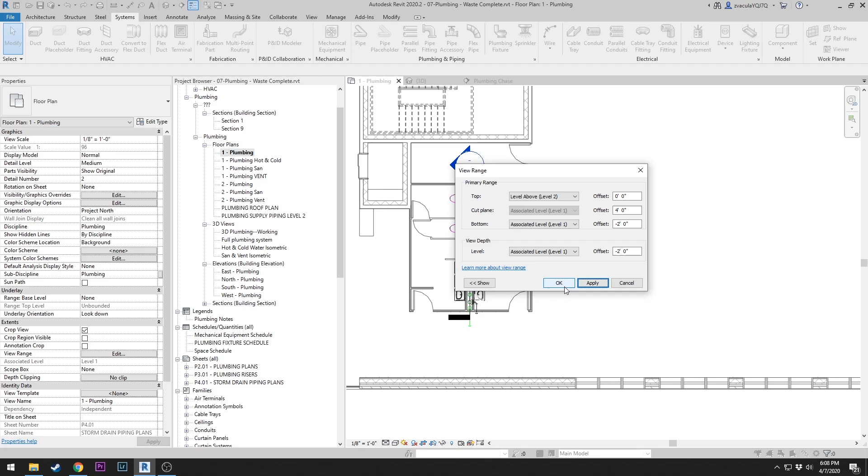Okay, so we have our view depth set. We're going to start by going to the pipe tool. This is going to be a 2-inch pipe. Our middle elevation is going to be at -2 feet underground. And important, you want to make sure this is on the copper pipe type, and that our system type is set - maybe set from sanitary or vent from doing the last project. You want to make sure this is set to domestic cold water right here. This will allow the filters to make the visibility look correct.

Okay, so I'm going to come from the exterior of the building here, and I'm going to bring it up and over in a 90. We're going to be coming into the chase here.

Now, depending on where you set your pipe, we might need to nudge this over to the left a little bit just so we can fit our pipes in here without interference. So luckily, if you created one big system, you should just be able to highlight one pipe and use your arrow keys to nudge these pipes over.

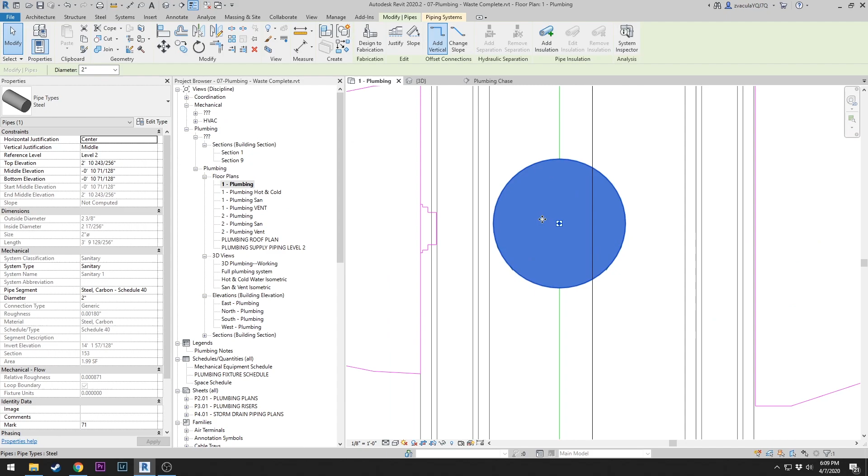I'm just going to make sure that we stay inside the chase, but make sure I have at least over 2 inches over here. That's almost 3. So that should give us plenty of space here to draw our supply pipe.

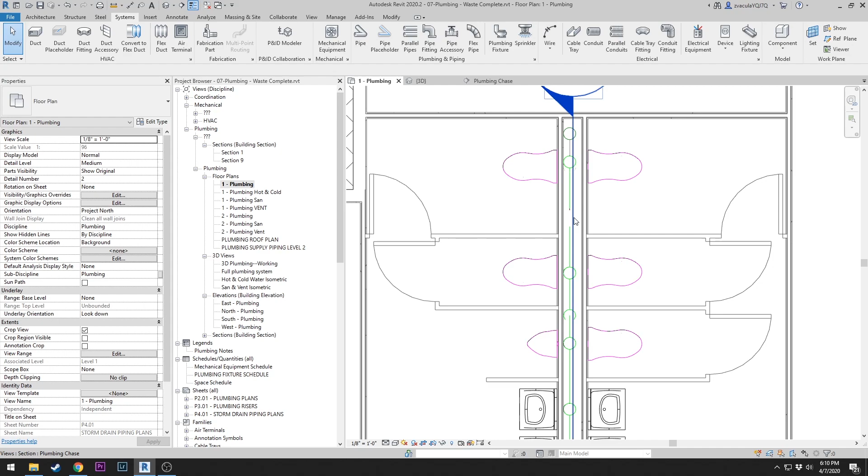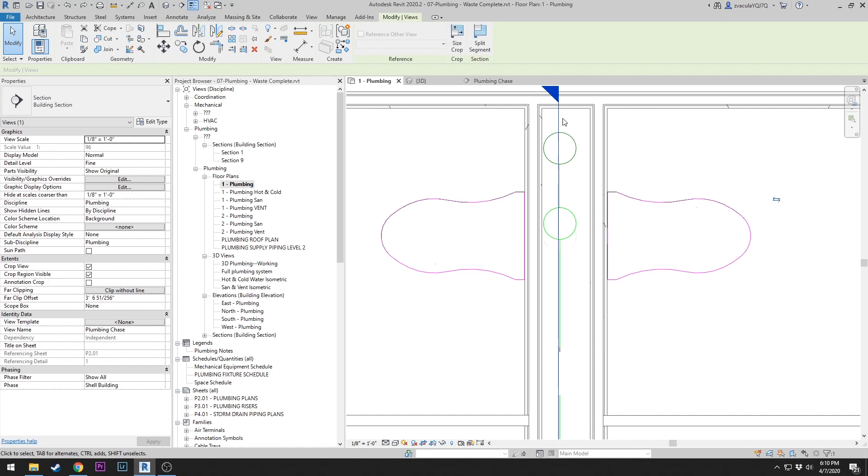And also, we're going to unpin and move our section here. In the previous lesson, I said to pin it and not move it because you couldn't align it. Well, in 2020, you can actually align sections to other pieces. So this is good for us, so if we need to come back and be on this chase plane, we can just align it with the pipe and go about using that same section.

Alright, so I'm going to scoot this section back where I can see my supply pipe, at least, is crossing it a little bit. And I'm going to go into my section, zoom out, and see the blue. The blue is your supply here.

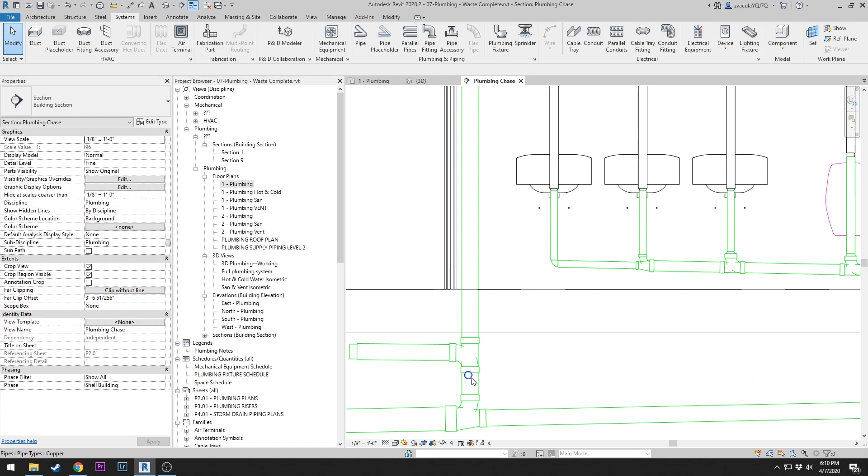So I'm going to create a similar run, hit it here in the center, and drag this straight up. And remember, we moved this over so this is running directly side by side with the drain pipe here.

Okay, so I'm going to draw up and over. I'm going to draw out a 90 here so we can feed in, try to connect to that pipe so we can have a stub out right here. And I believe this one is 1.5 inches.

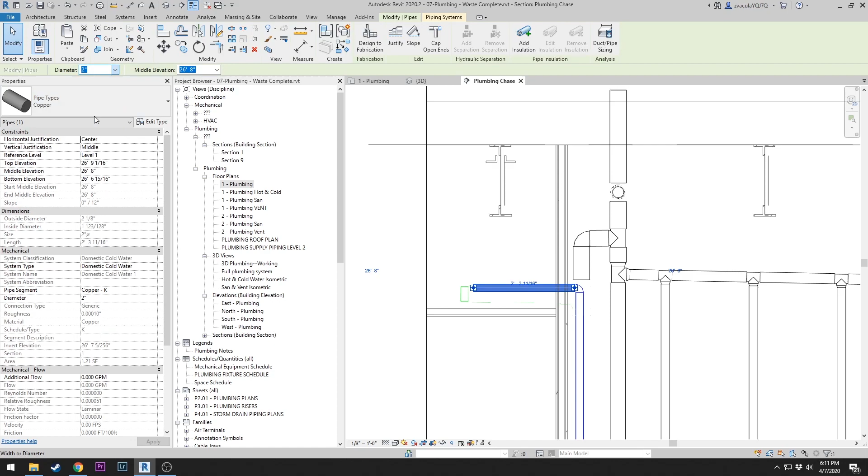Alright, so now we're just going to start feeding overhead our supply. Come all the way over. So we're not actually going to connect these supply pipes to the fixtures. Basically, we're going to run stub outs right beside each fixture, and the last little bit they would run with either flex or run it directly in, depending on what fixture they get. So we're not actually going to directly connect the supply to the fixtures here.

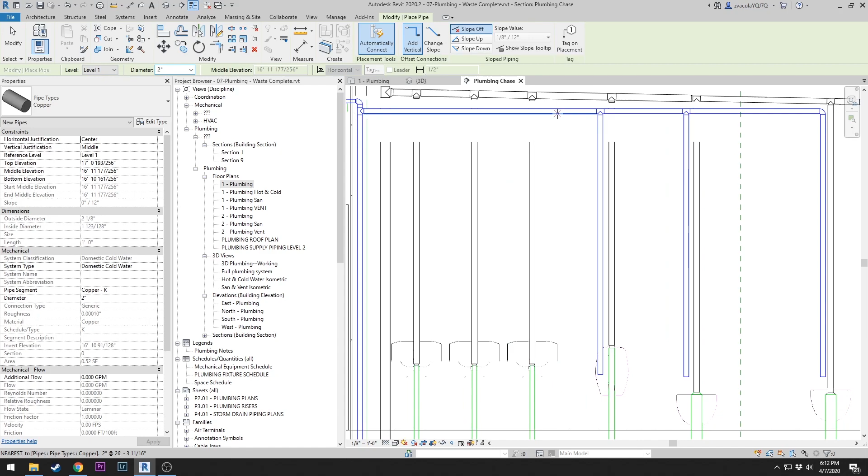And then for the sink, we're going to run one supply. We're basically going to run the supply behind the sink in one pipe, one horizontal pipe here, like this. And they would tap into this as needed.

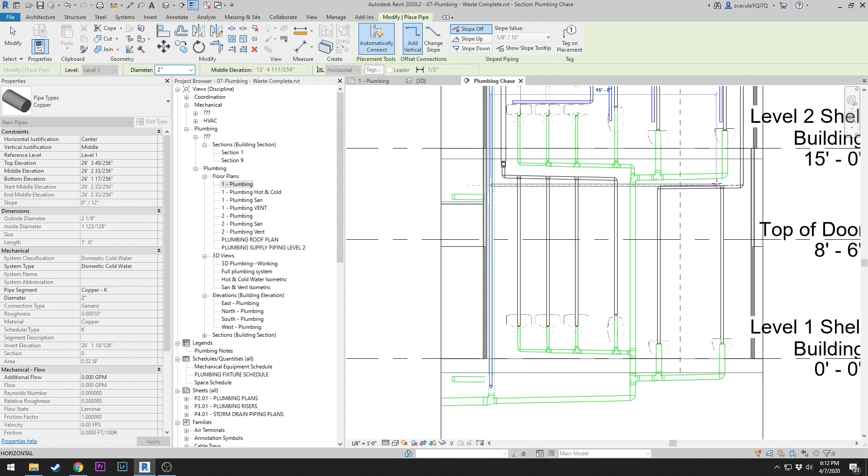All right, so now we're going to go and do the first floor. And I'm bringing this down the same height as the other ones because remember there's a regular sized toilet on the other side of this.

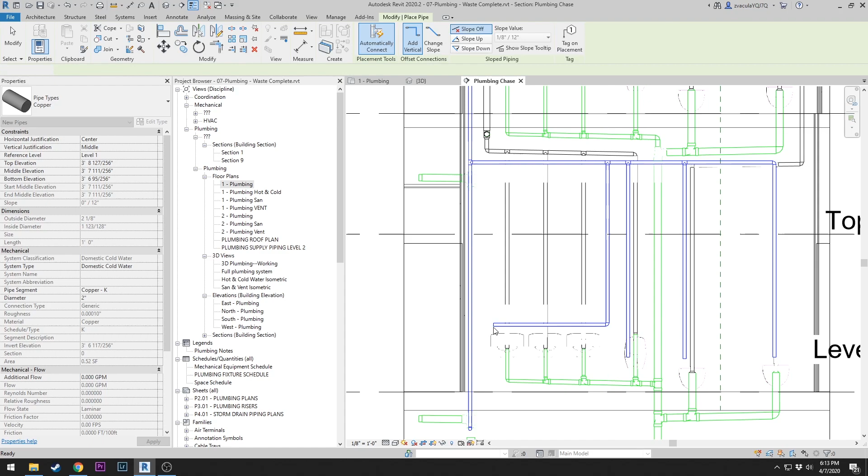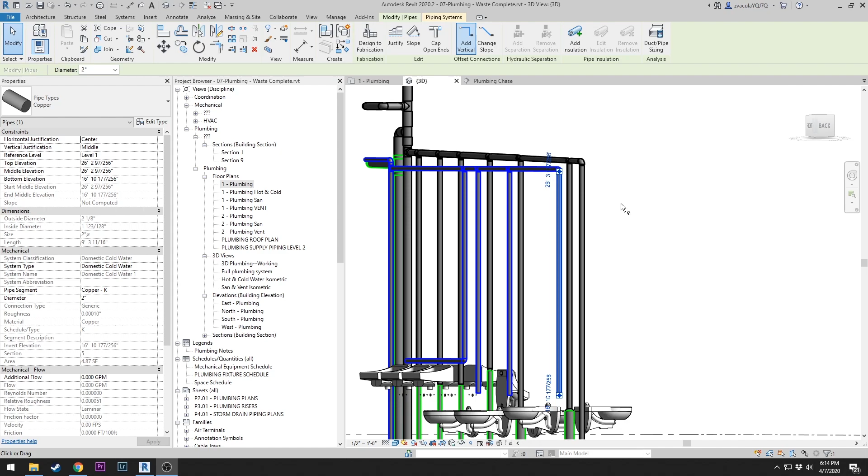Alright, let's take a look at that in 3D. See, everything's blue. Now you have all of your pipes running side by side, no interference or anything.

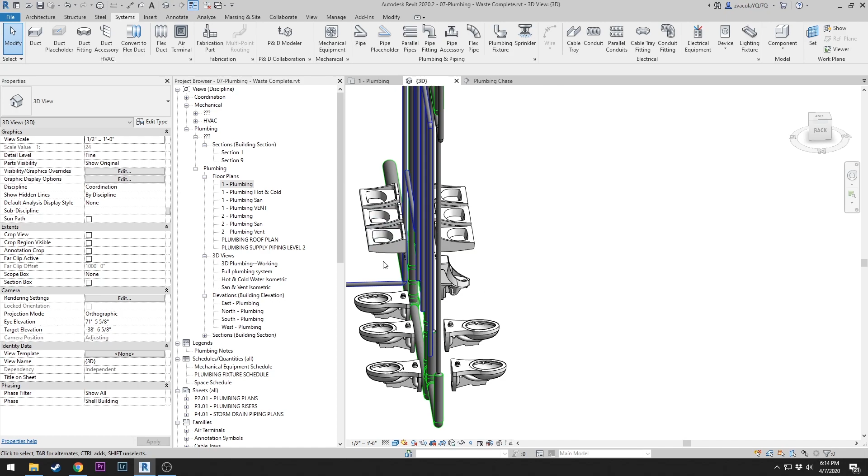And actually, let's add one more stub out for the first floor as well, above the ceiling. And don't forget to cap those.

Okay, so next we're going to add a water heater in the janitor's closet. So it's going to be on the second floor. Go to our second floor view here.

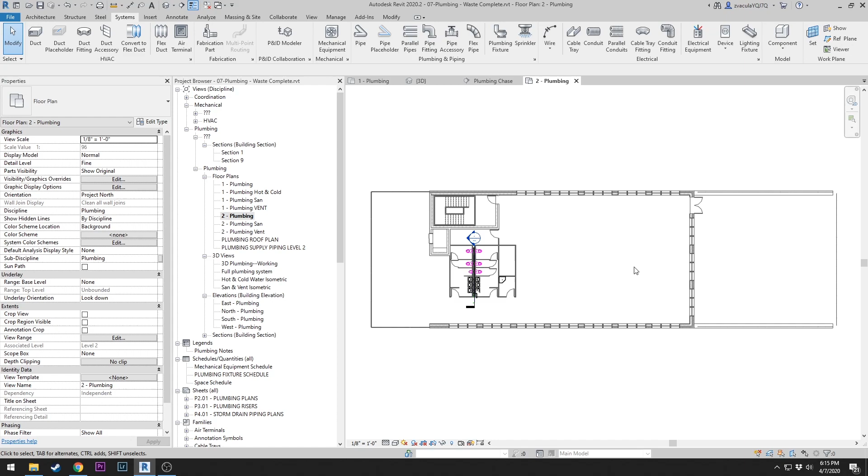We also want to copy monitor this, copy monitor the mop sink if you did not originally. So let's go ahead and do that first. Go into collaborate, go to copy monitor, select link. Same process as the other ones, except we don't need to do a multiple copy. We're just going to do a single copy of the sink. Click on that and say finish.

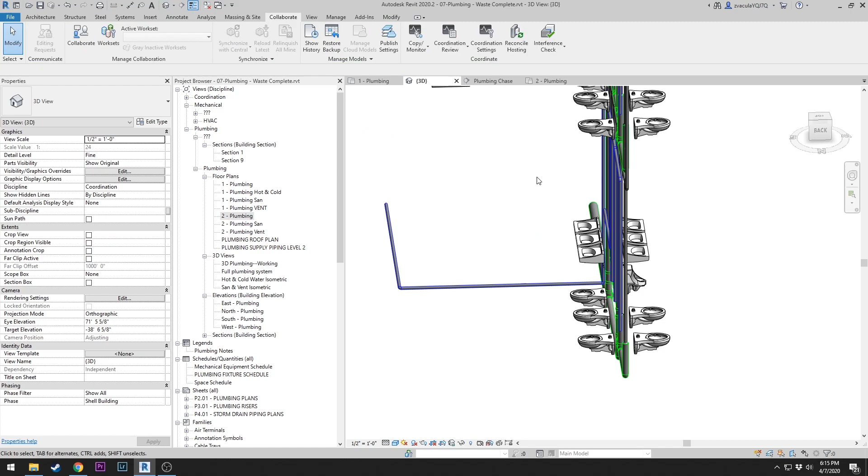So now you can select it and you see that it's in your model. If I go to my 3D view - so this view I have set up right here, I have just the architectural model turned off in visibility graphics - and if this sink were not copy monitored in, then it wouldn't be showing up right now.

Alright, so we need to insert a 40-gallon domestic hot water heater. That's going to be in your mechanical equipment, under water heater, we're going to use this 40-gallon. Click and drag, make sure your constraints are level 2 and 0. It'll sit on the floor, so I'm going to drop that in there.

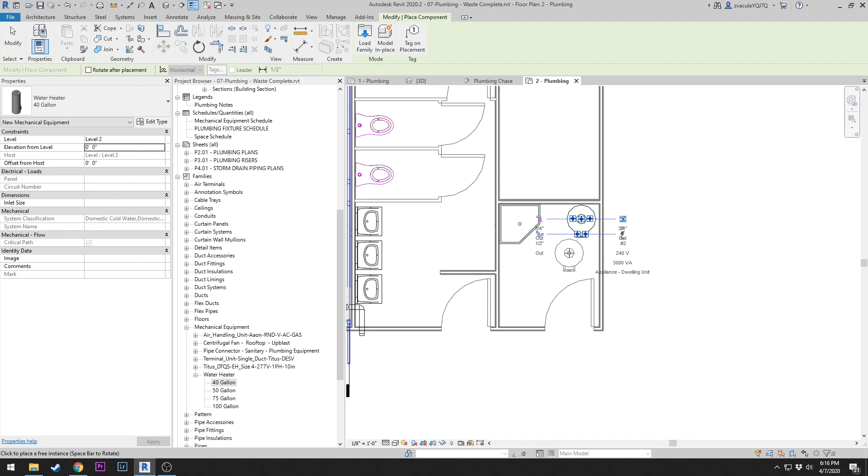Next, we're going to add a pipe to feed the cold water into our hot water heater. If we look at this in 3D, you'll notice you have an in right here on the right hand side. That's where we're going to run the cold water to, and then out we'll run our hot water up and over to our sinks.

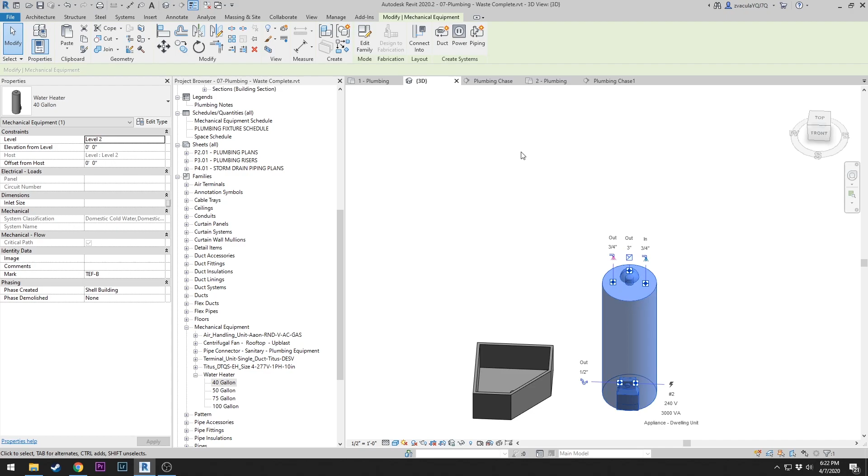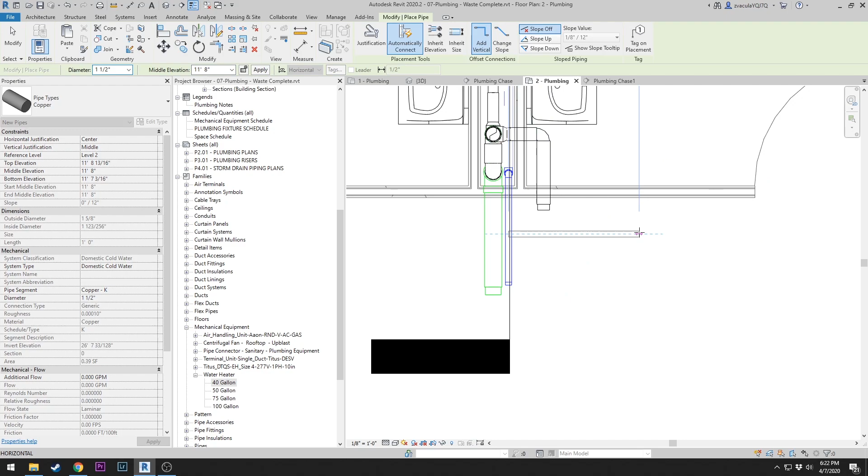Okay, I'm going to start in level 2, go to the stub out that I created, and just do a create similar. Main thing here is so that we can grab that middle elevation. This pipe is actually going to be 3/4 of an inch, so just like the duct, if you want to change the size of a pipe, you'll click it to start and you'll need to change it after. So we'll change that to 3/4 now.

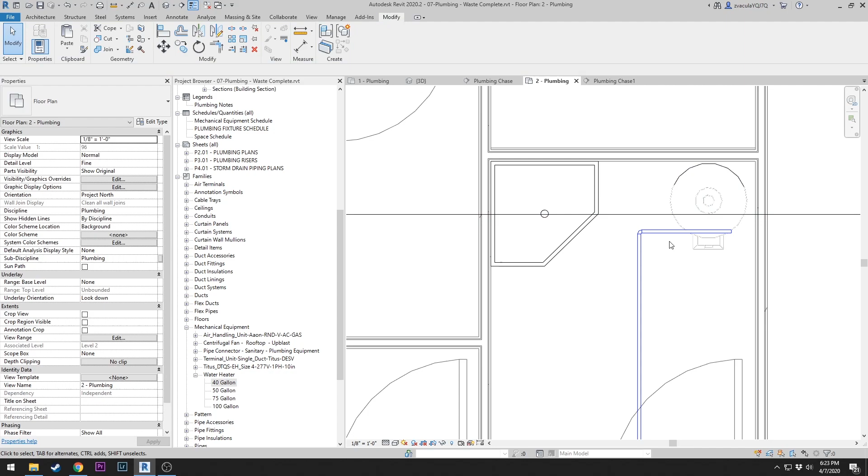We'll run this up and over. We're going to delete this elbow here because we're going to create a T to feed into the wall, and that will feed our supply for our mop sink here. Let's come up a little bit, so just intersect that pipe and it'll turn into a T.

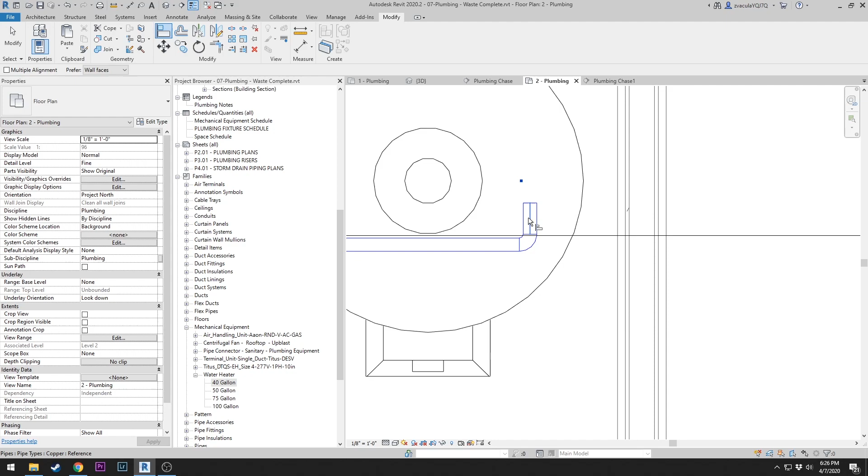From here we're going to just turn this pipe up towards our connector. Let's make that a 90. You can align, so AL for align, and if you hover over the center here, notice it gives you the center line. But if you find that connection point and click on it, then click the middle point of this pipe, it'll snap align that pipe directly to your connection point. Then you can just click and drag it straight up until you get your node there. It'll turn it down.

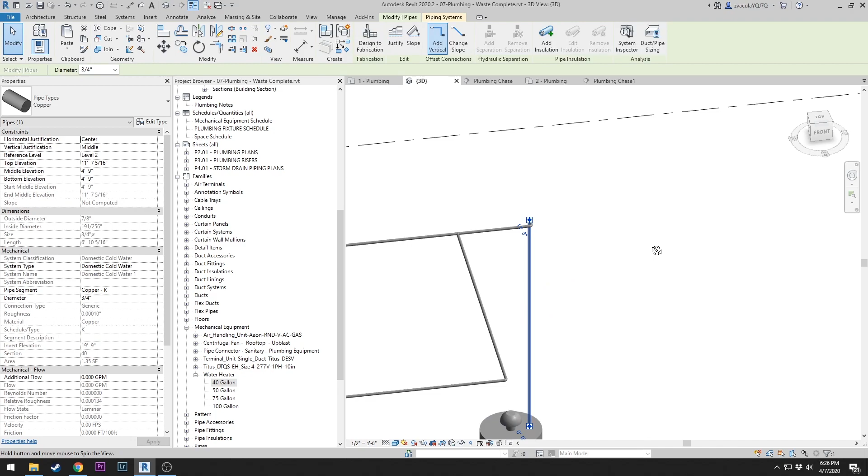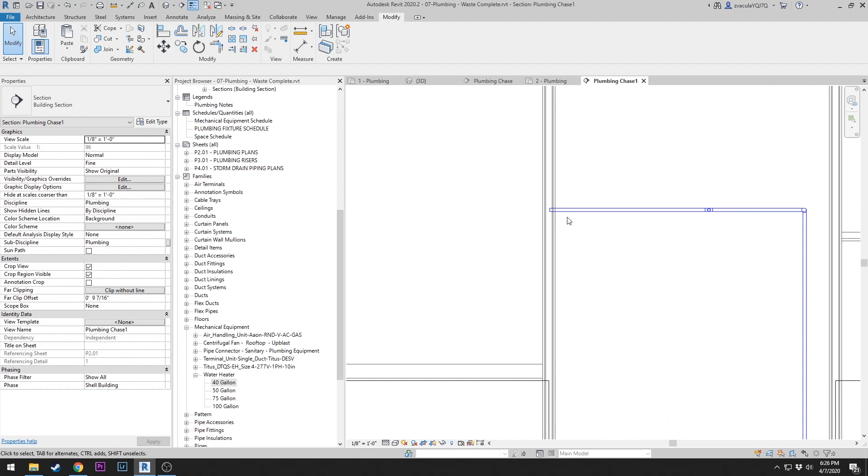All right, so now we're going to use one of our sections and run this pipe directly down the wall. We'll go into this section, find my pipe coming from my water heater, draw pipe, and run this directly down. It'll stub out just right above your mop sink here, and this will be for a fixture for the mop sink.

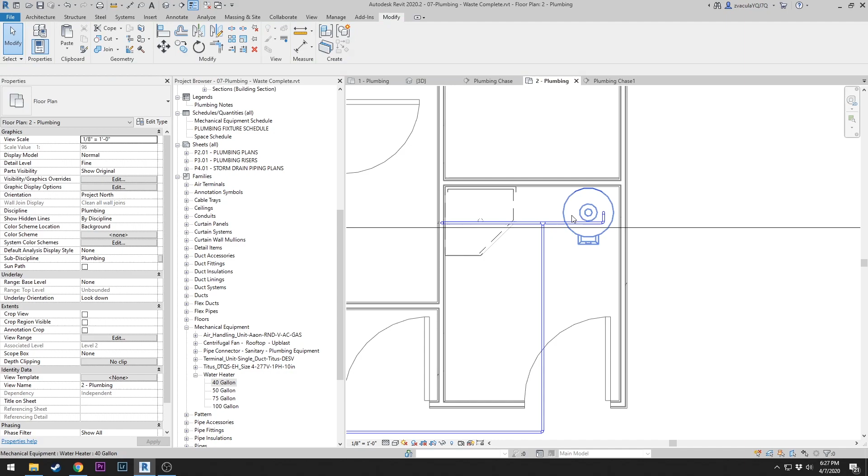All right, so we have this pipe here at 11' 8". Now we're going to create our hot water. So we'll click here, go into my section. I'll click on my hot water heater, click the out button, and run this up and over.

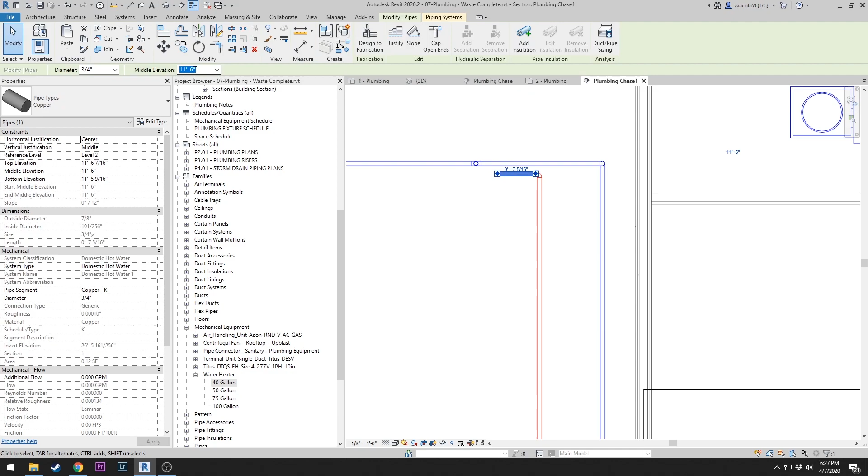And then I'm going to set this to the 11' 6", the same as my cold water. I didn't do that initially, just coming up and going over here, because it probably would have tried to connect to my cold water, and I don't want that. But now you see we have our little stub out here that we can draw a pipe, bring this over into our plumbing chase. Make sure you don't connect any pipes in here.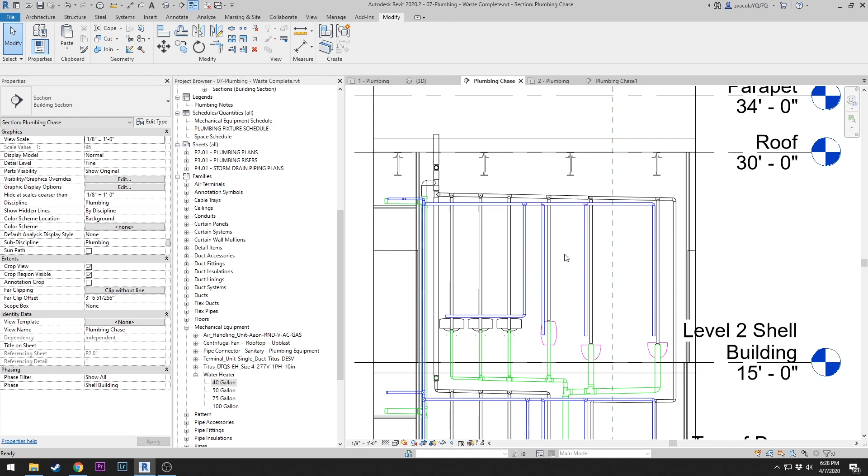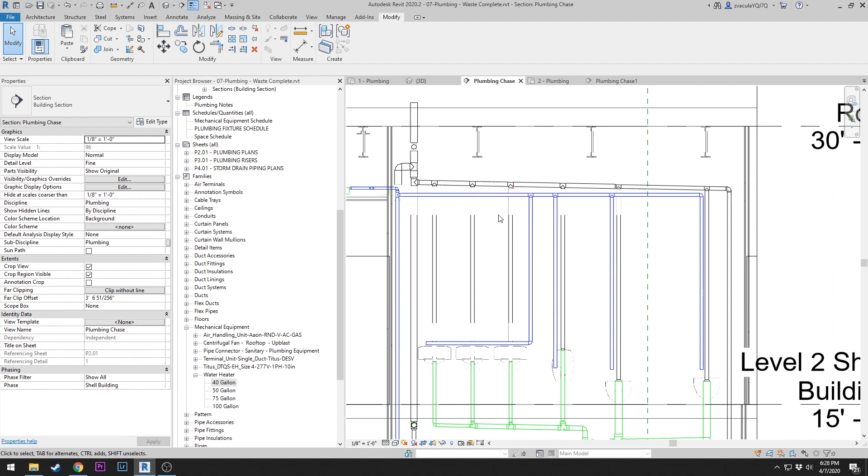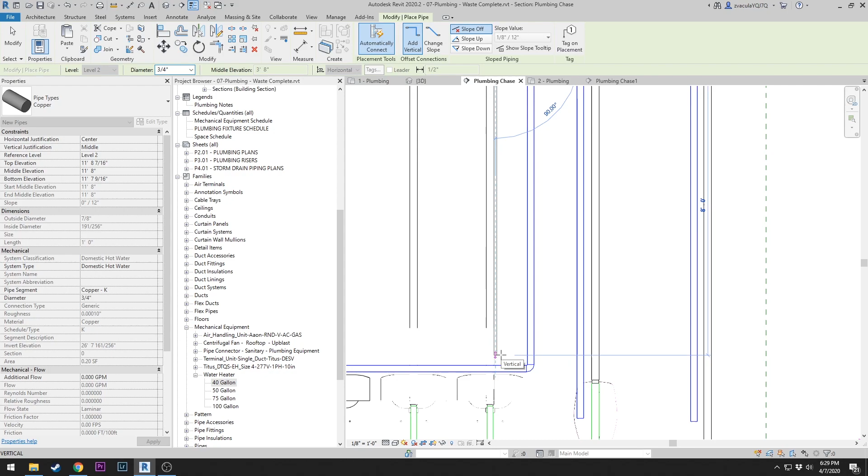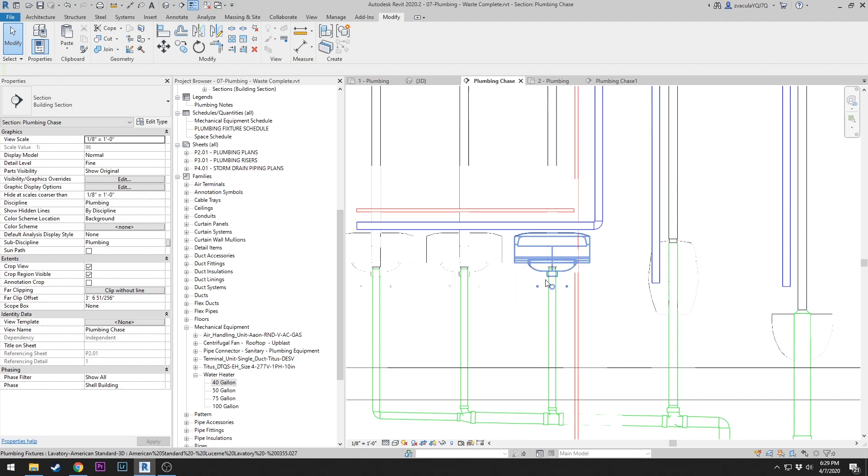Let's go into our section and see if we can find that red pipe. If you can't, it might not be far enough. Yeah, I think this is our section, here's our pipe, there it is right there. I'm going to create similar and do the same thing that I did for my cold water, bring this over, down and over. We're going to delete that elbow because this one we want to just run straight down, and do the same thing with this.

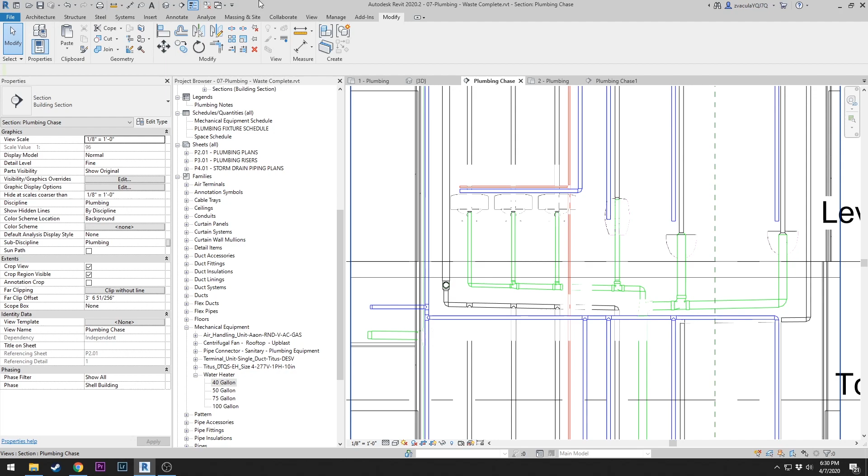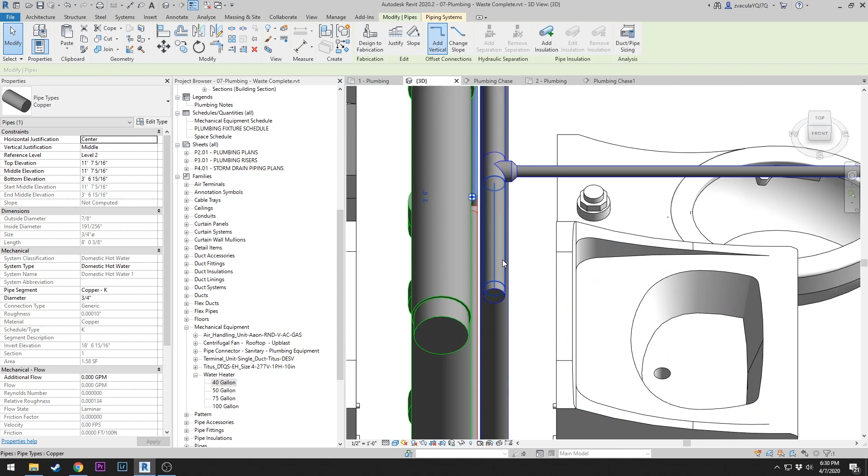All right, looks like we have a little interference here, go ahead and clean that up. That should be okay, we're good there. Down, missing that. All right, get the hot water in there.

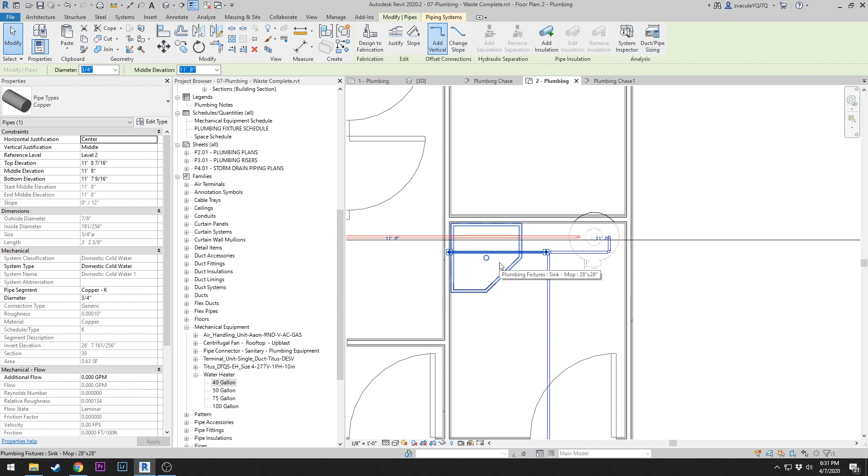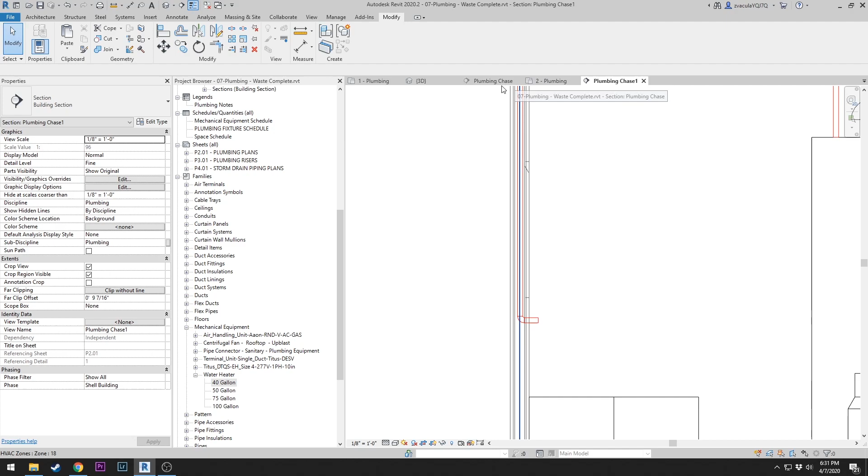Now let's run a small piece from the hot water down into the, scoot this up so they're a little closer together. Run a piece from the hot water down to the mop sink, so they have hot water there as well. Create similar, over here and out, and then we'll line up, make sure we get the same height for the hot and the cold water. Just bring your section back a little bit. You can use the align tool there to there.

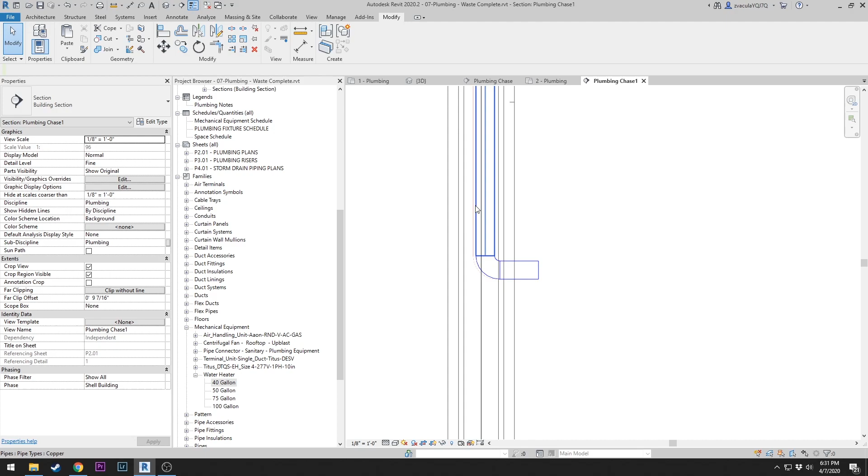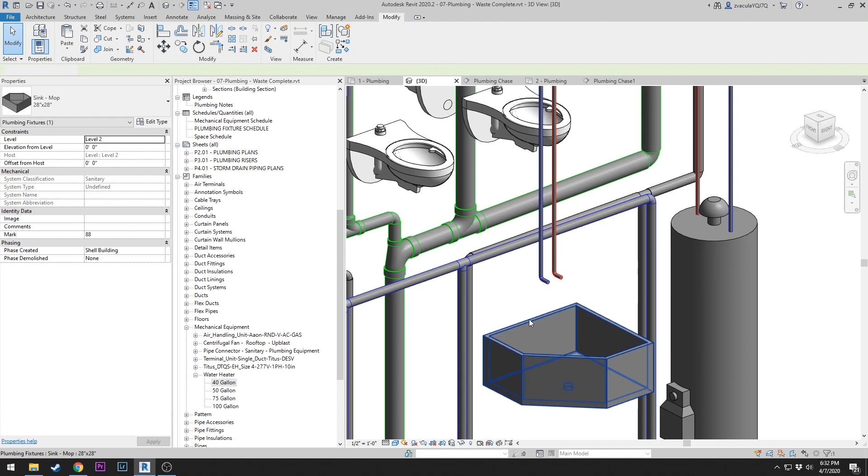Alright, so now we need to create a drain and vent for the mop sink that we just added here. Okay, so we're going to start off again in a section.

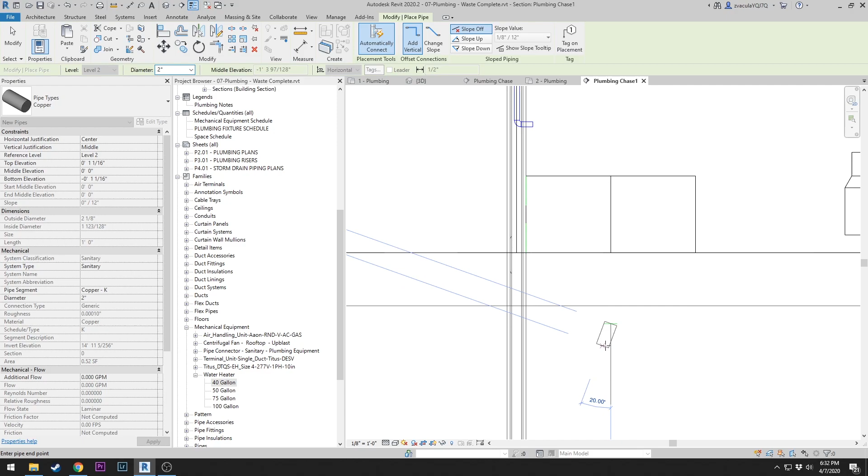Also you have to kind of think that, okay, I'm bringing this pipe down here. I need to run this in either a section or in my first floor view. So that will get our pipe started for the first floor.

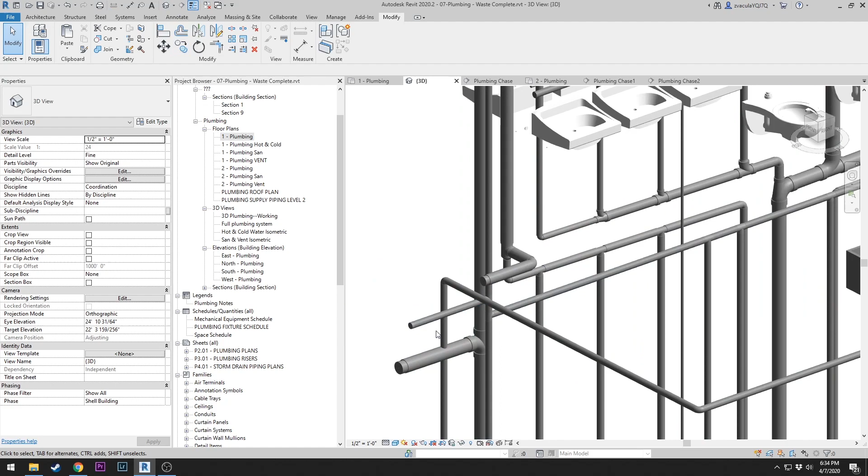So basically, as long as you're above or below and you have enough room to make those corners, if you just bring this down and over and then connect it to your pipe, and hit this elbow here, it should automatically get connected to the first floor. It should automatically make that connection. Let's do that.

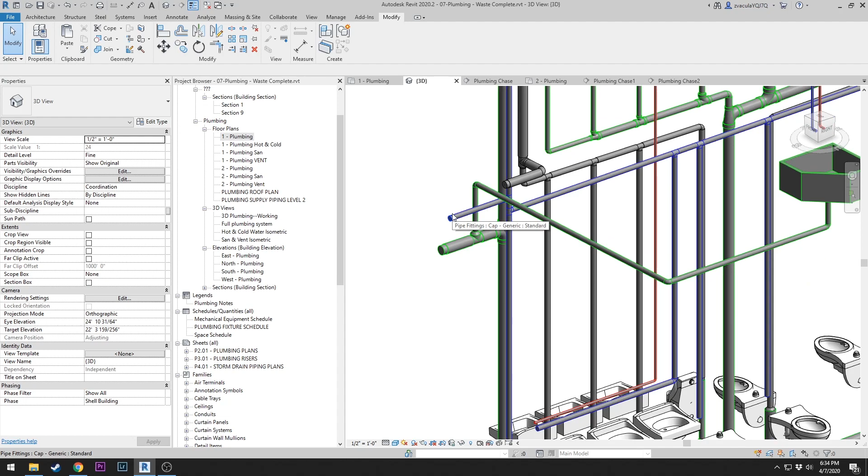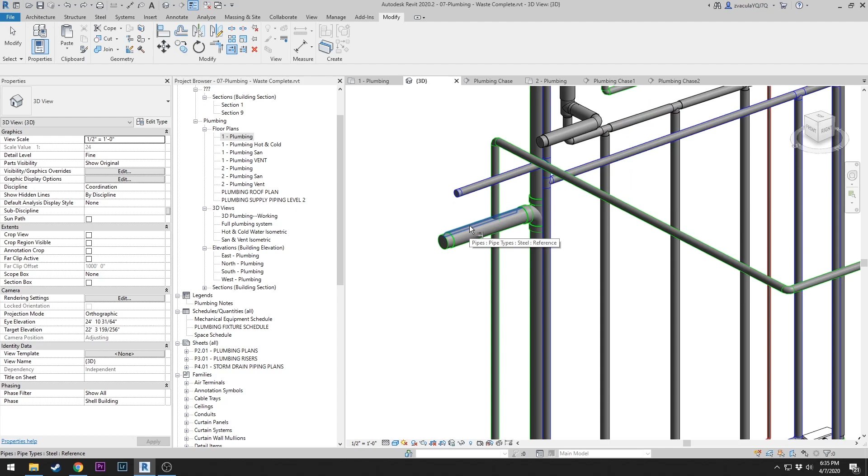Alright, the command I just used was the trim tool, or the trim extend. You can either use the single element here, so you can activate that tool, and we know that we want this pipe to stop here at this stub out instead of this one down here. So I can click on this stub out and the pipe, and it'll connect those two.

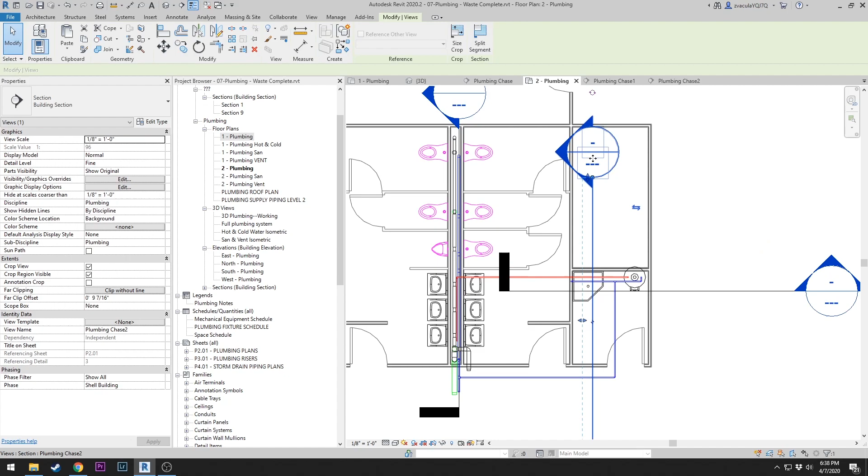So for the vent pipe for the sink here, we're going to start off in my vertical section just to start the vent pipe. So we'll go here. I'll create similar. Set this to vent. And come up.

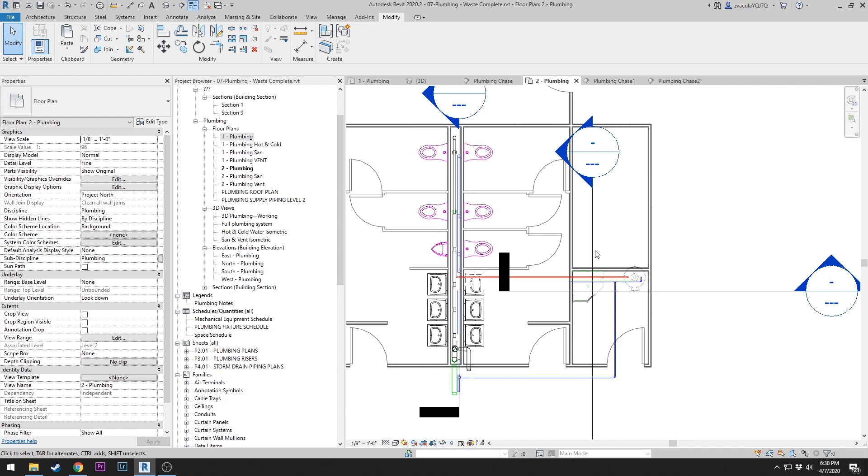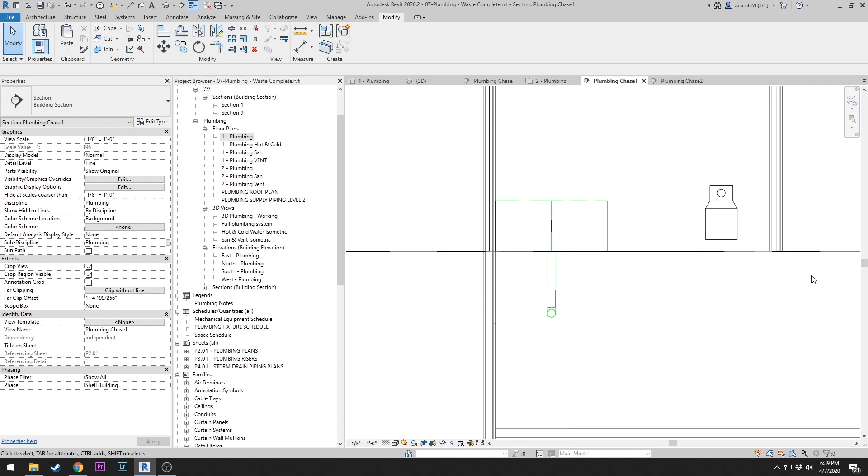Once we have it started in this section, we actually want to go to our horizontal section here so that we can go over. Let's make sure we're catching that. There we go. So our vent pipe is right here.

And we'll draw a pipe, and we might scooch this down, go over, then up the wall here. And I'm just going to create a little leg going this way so that I can pull it out and see it in floor plan.

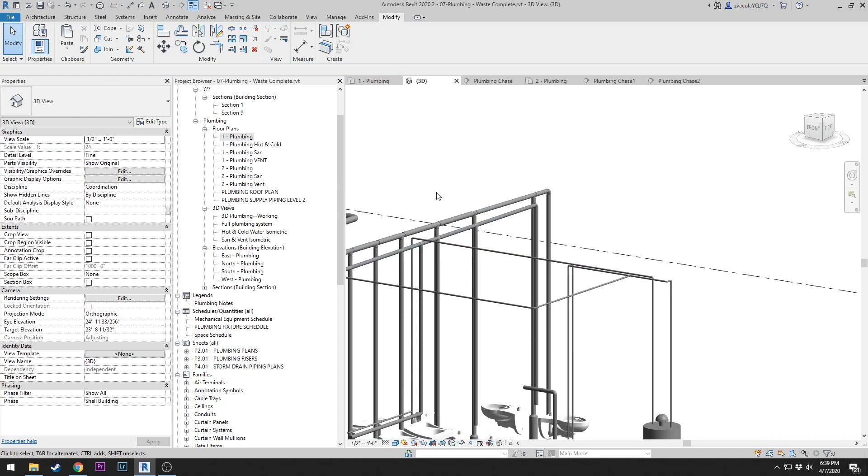Alright, so we go into our level 2 here. Notice that we have our vent pipe coming over. We're going to need to intercept this vent pipe right here. Basically, we need to intersect this and this guy.

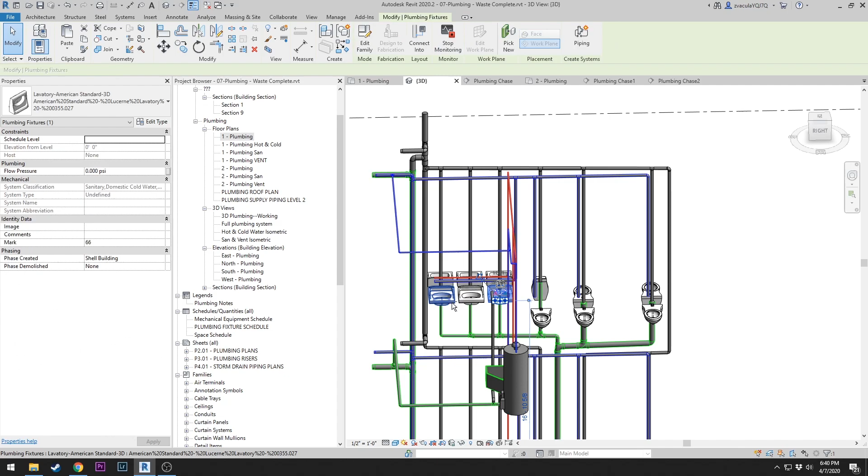Alright, so you see this is about middle elevation. Actually, we'll hit this one, 1110. Just make sure you raise this to about the same height.

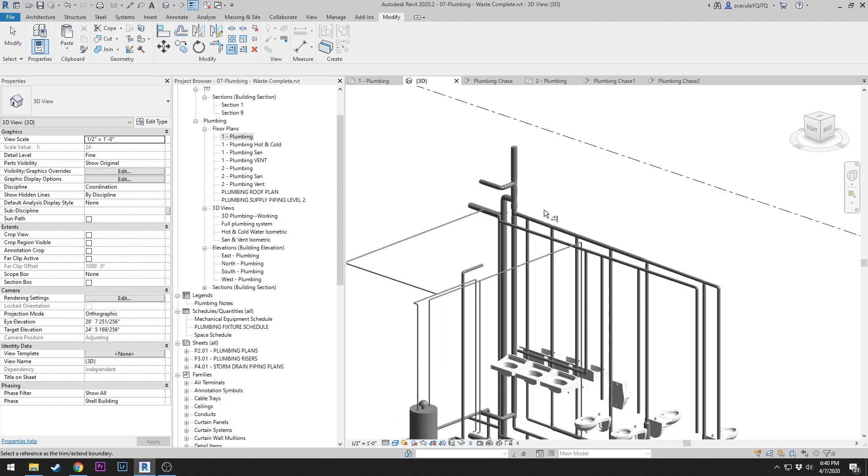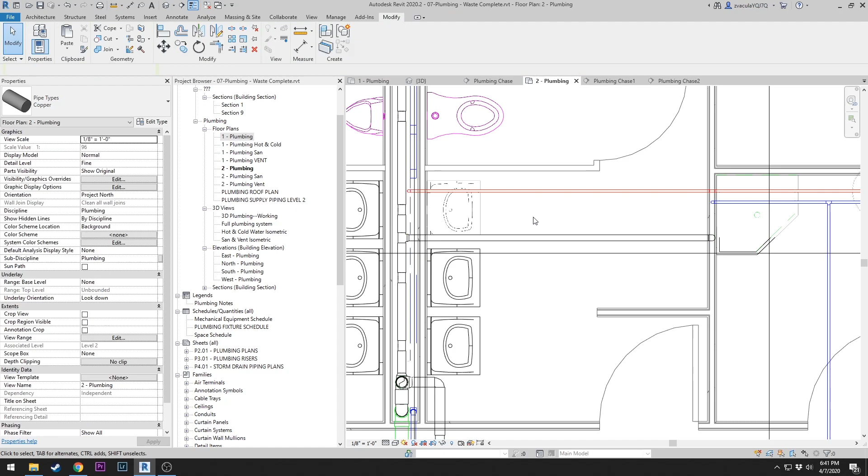Then try to use a section. We'll need to go into 2, let's use this section here. There's a button up here, change slope. So you can turn that on and off, and if you turn it on and intersect it, now you see that it's at a slight slope, and it will slope up to meet where you need.

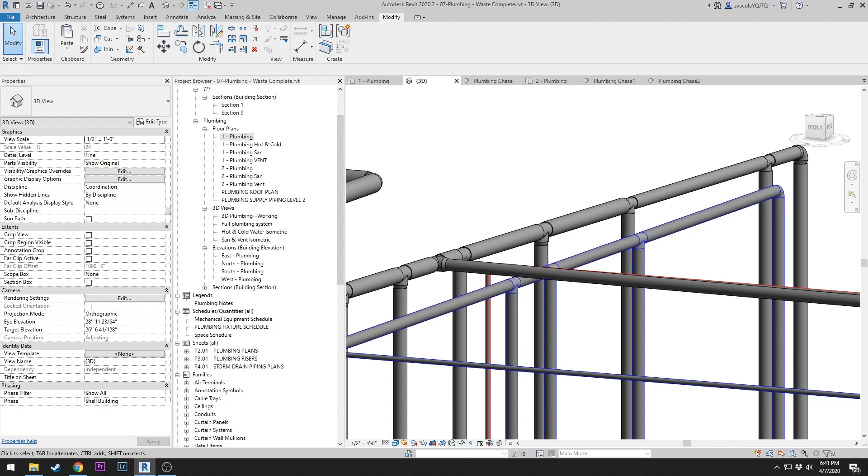All right, and the last bit of this lesson is we're actually going to hook up the plumbing fixtures to the sanitary line. We use a section for each set of toilets. So let's look at these.

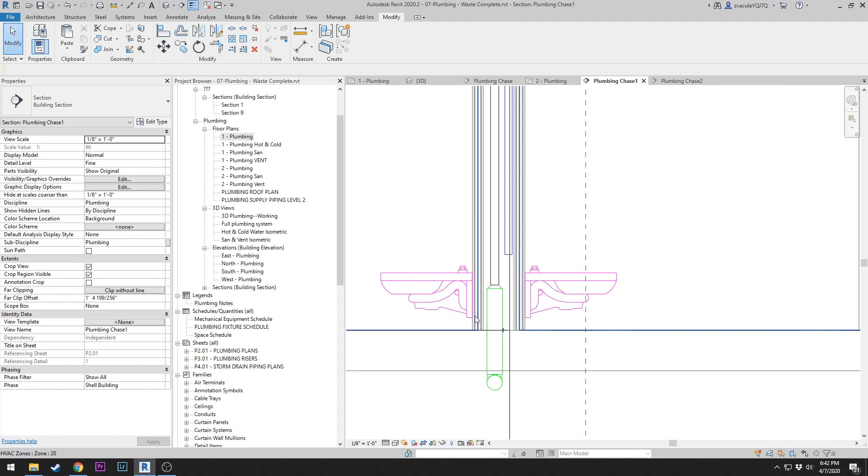All right, so these toilets have automatic connections out. So basically, you can just hit out, and you want to drag across, all the way over here to this other toilet, and then make sure you set your T to double sanitary T's. Don't forget that basically you have 4 toilets on one section, so you can do both the upper and lower floors at once.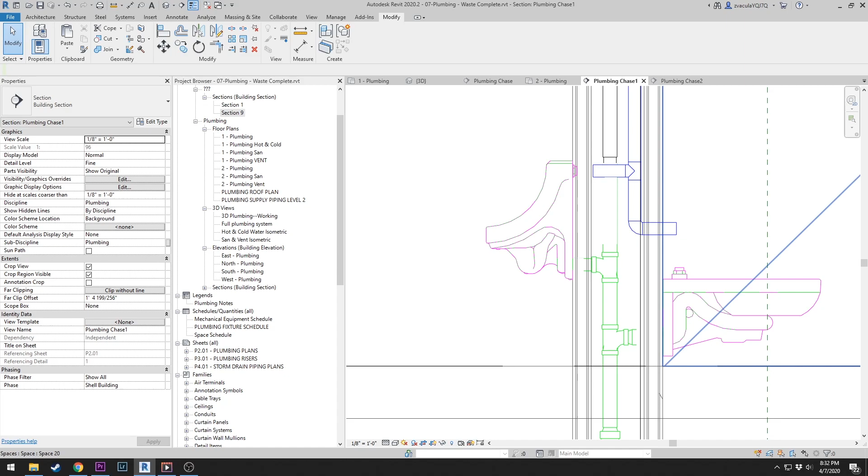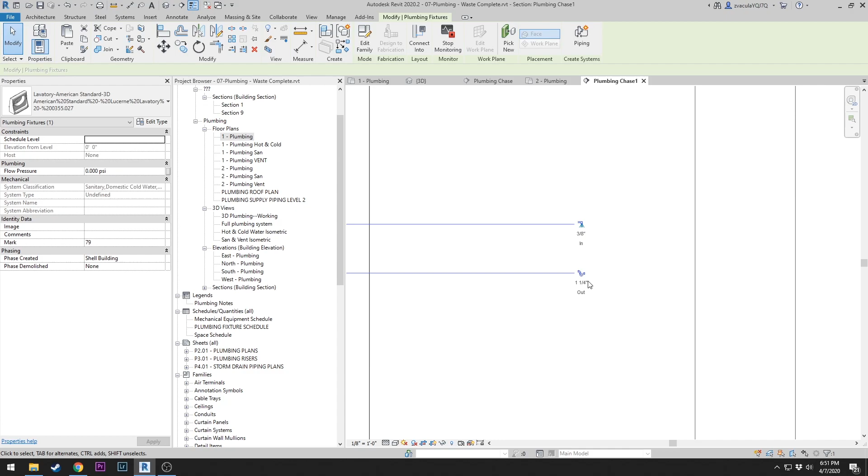So keep going for the sinks. Sinks should be the same thing, though you have all your connections coming out pretty close to each other, so you need to zoom in here. Make sure you hit the bottom one, the out, and just drag it over.

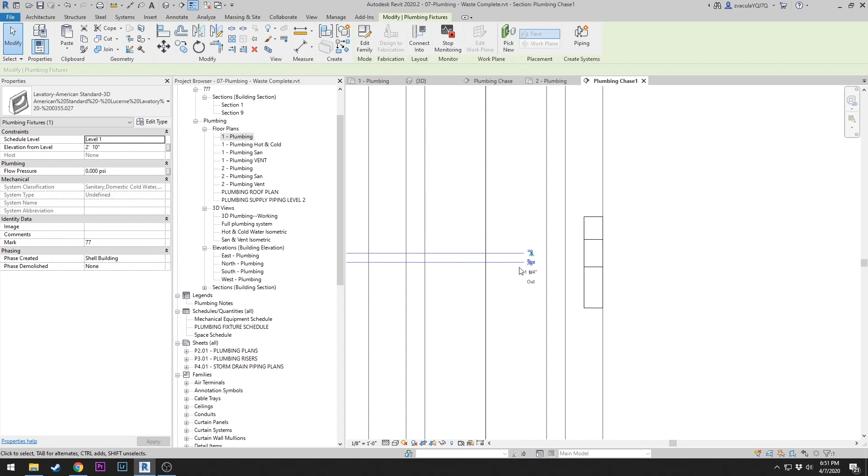Sanitary. And yeah, basically as long as everything is lined up, it should just connect right up to each other. Keyword should. If you notice that you cross these pipes and nothing happens, that means you're probably not aligned perfectly.

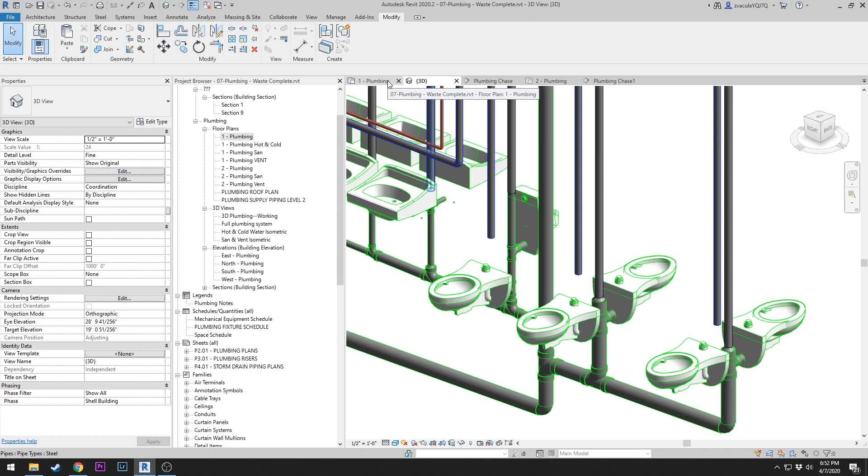Okay, so once you have everything done there, lastly we will put the stub outs for each toilet. I use my same section here.

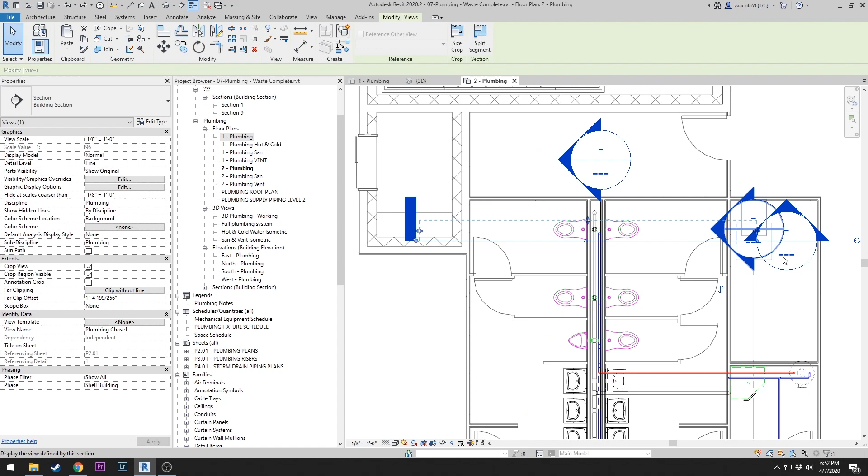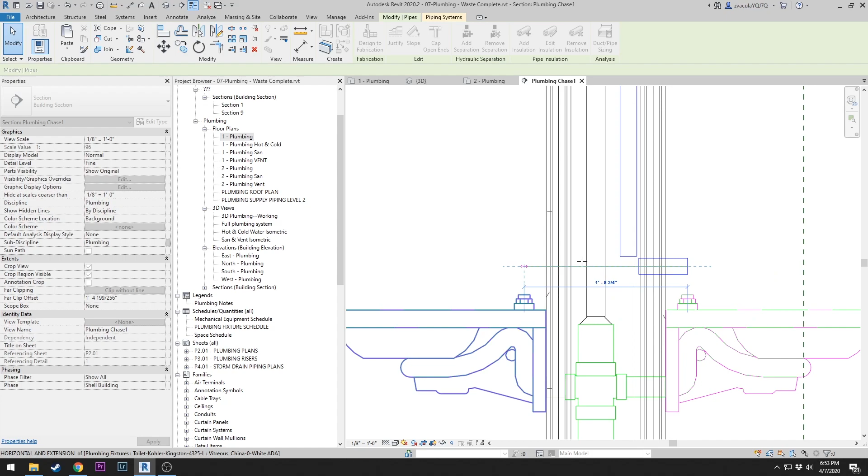And we'll go and we'll find our blue water line, and you'll do this for basically all the toilets. You'll come off in one direction here, then delete the elbow, and then pull this out over here. This basically just means it helps you make an aligned connection. Draw pipe out, delete.

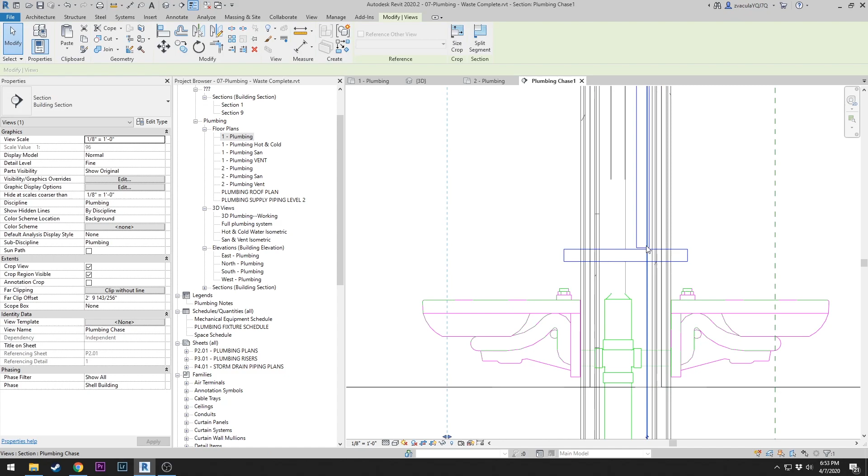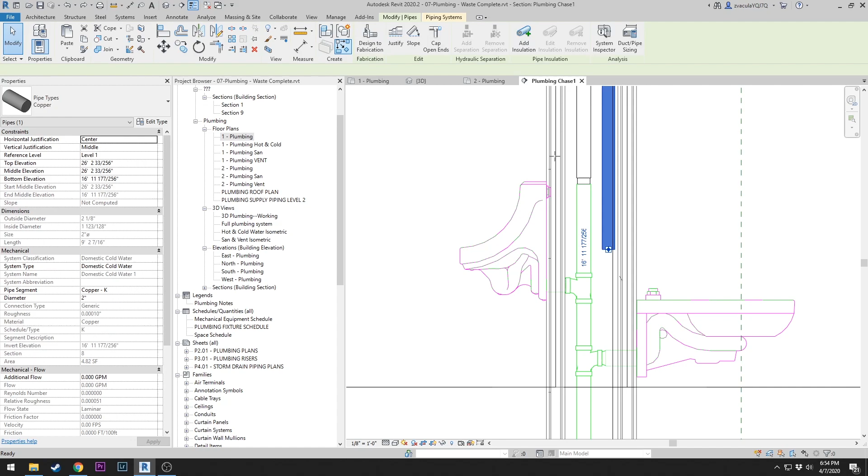And lastly, we're going to put the ball valves on the water supply so that they can turn off specific parts. Okay, that is going to be in the systems, pipe accessories, ball valve.

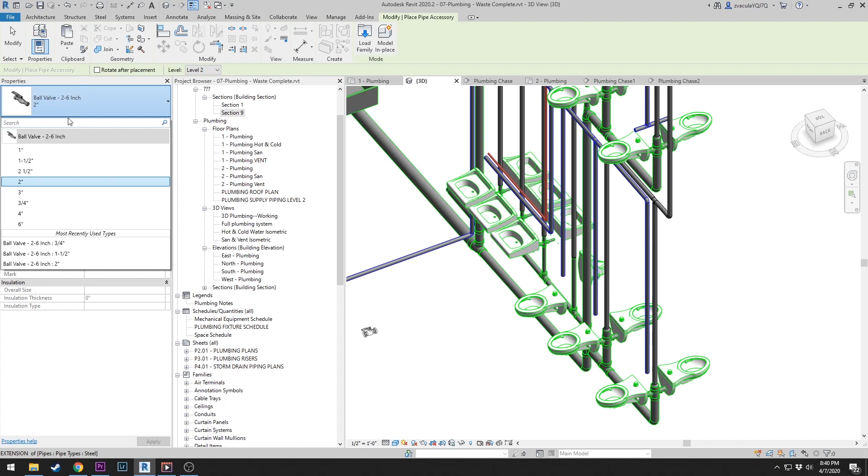So these things go on just like the dampers do on the HVAC stuff. Only difference is these you actually have to change your size manually depending on what you're connecting to. So we know that we're going to connect to this 1.5. We're going to put one on each side of this run here, so we can isolate and turn off what we need.

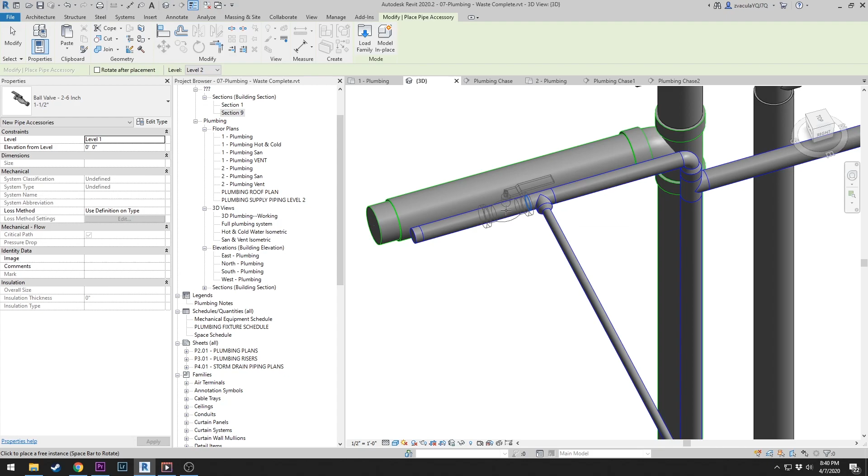So we're going to say pipe accessories. We know this is a 1.5 inch. One there and there. We need a 2 inch here. This one is 1.5. Couple here.

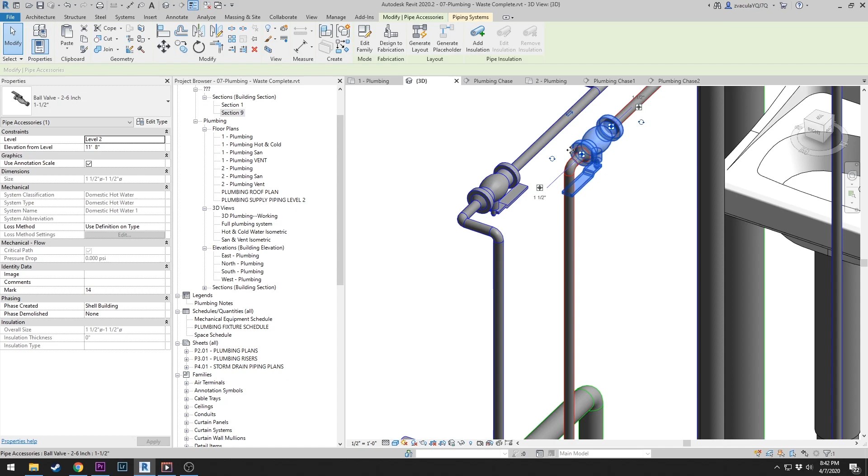Then whenever we get around to doing collision detection, you might need to kind of rotate some of these around, depending on if you're right above or right up against ductwork or something. So just know that these things can be rotated by the rotation arrows here.